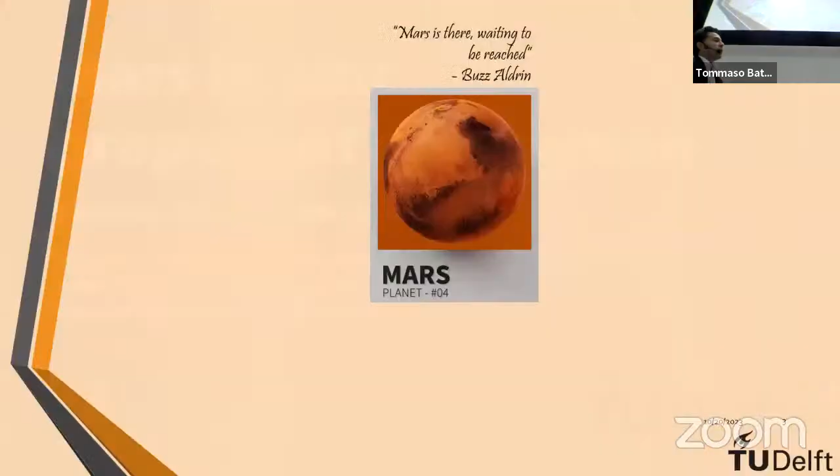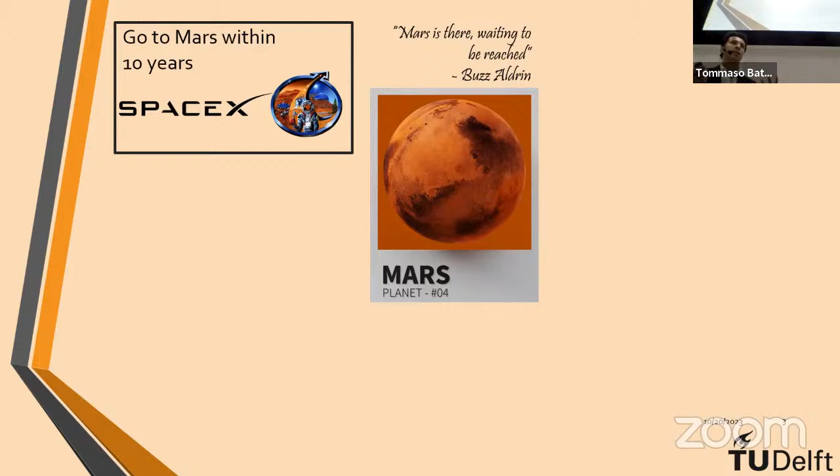So the goal is to go to Mars within 10 years. It's a challenge that SpaceX took on first hand, and the Mars Society have done a fantastic job spreading the word and raising awareness about the topic. SpaceX developed Starship, the rocket that is going to take us to Mars, which made its maiden flight in April of this year.

Starship has an engine called the Raptor engine that uses a deep cryo-methalox combination, meaning it combines methane as fuel and oxygen as the oxidizer for combustion, producing the thrust to leave this planet.

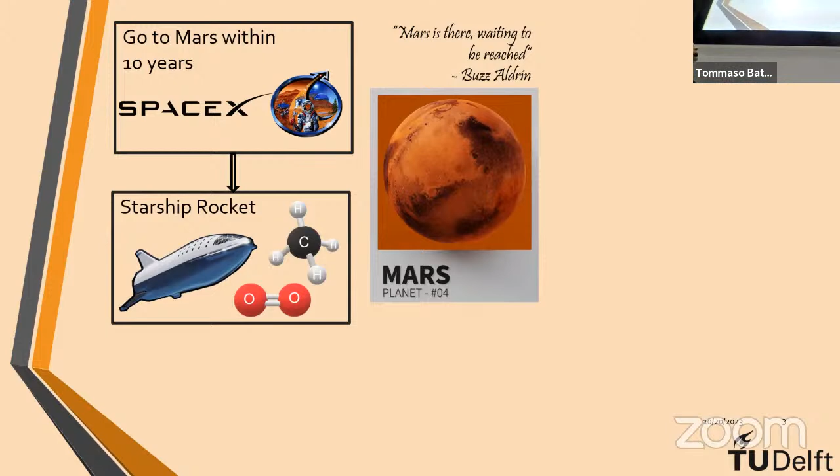Not only will we need a rocket to go to Mars, we will also need technologies to survive on the red planet. NASA has been working for many years and developed guidelines for companies to design these technologies that would allow us to survive on Mars.

And some of these technologies use what is called in situ resource utilization, or ISRU. ISRU basically means that you use the resources already available on Mars to produce whatever you need to produce.

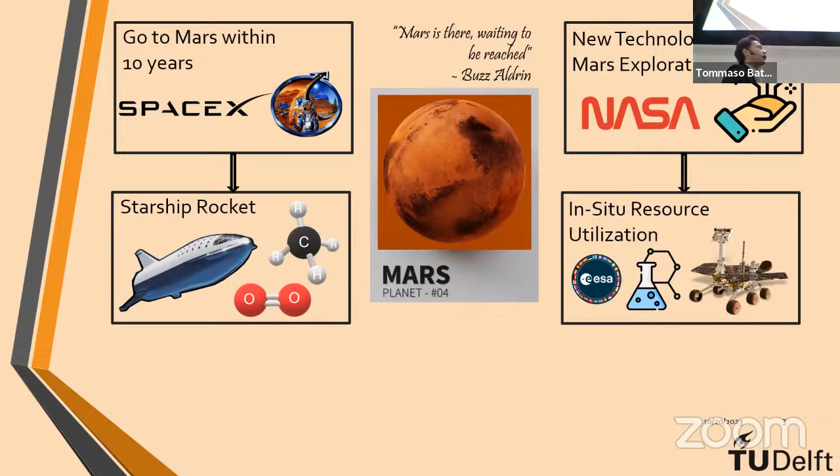As part of this work, I visited the European Space Agency. I have to give thanks to Louis for allowing me to do so, here in Noordwijk in the Netherlands, at the research center, and I worked with some researchers who directly work on these topics, who greatly helped me as well.

So the goal today is to design and model a propellant production plant on Mars. Now let's talk about the Mars mission. The trip is expected to last 6 months, for a mission duration of 3 Earth years: 6 months to go, 2 Earth years on Mars, and 6 months to come back.

But the conditions on Mars are really challenging. It's really cold on Mars, with an average temperature of negative 63 degrees. It can get warm during the day, but very cold during the night. I have to say, it doesn't rain on Mars, so it's already better than the Netherlands.

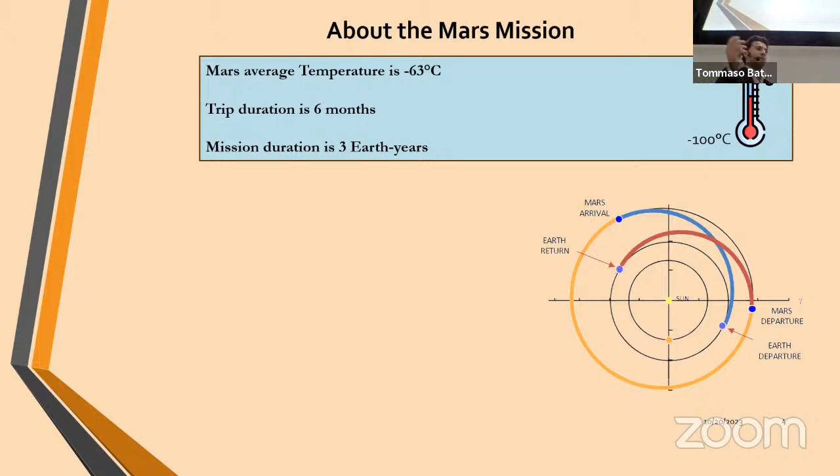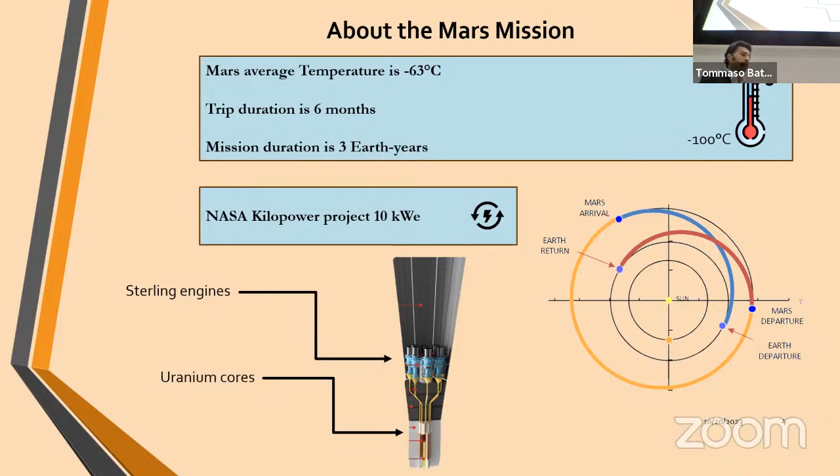We will need power on Mars. NASA has developed the Kilopower project, a nuclear reactor that uses the heat of decay of enriched uranium to produce heat that runs Stirling engines. They actually proof-checked this technology. It's ready to go, and they scaled it up to 10 kilowatts. For now, the largest size they've managed to accomplish is 10 kilowatts of electric power that this reactor can produce. Moving on, the first step of any thesis is to develop the research question.

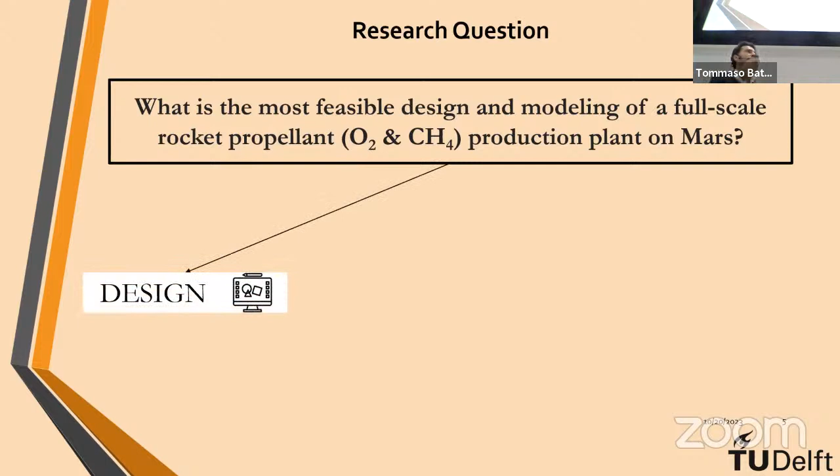The research question is: what is the most feasible design and modeling of a full-scale rocket propellant production plant on Mars? It's a very broad challenge, so it was decided to divide it into 3 sub-questions. The first deals with the design of the plant, the second with the modeling of the plant, and the third is a more theoretical aspect that we will see later.

So by design, what do we mean? We mean how to integrate NASA's guidelines into the design of the plant. By modeling, we mean how do we exploit the Martian environment to make our plant as efficient as possible. And the theoretical approach, which we'll see later on, is the development of a methodology for an exergy analysis on a different planet.

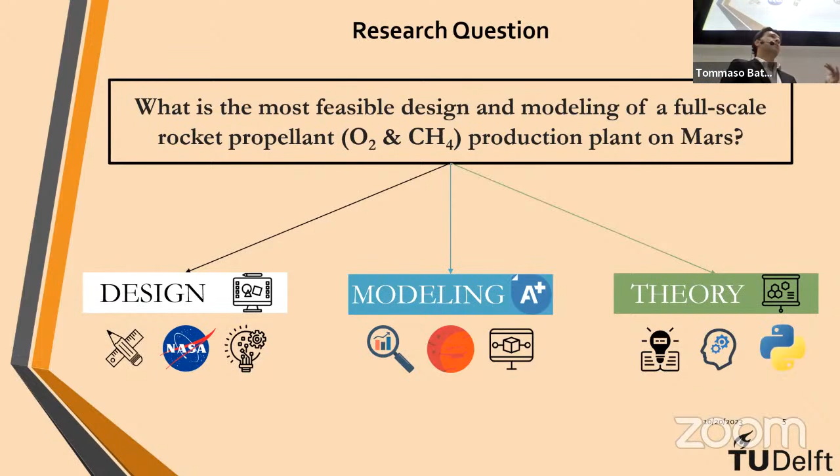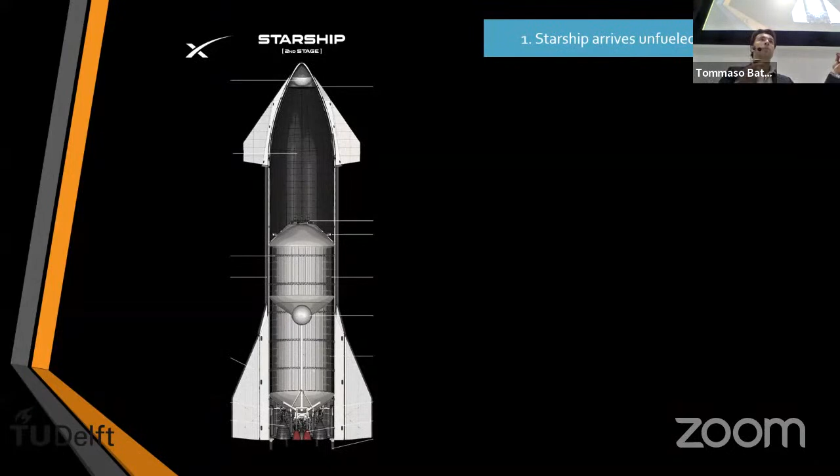Let's start with the rocket itself. Starship is the rocket that is going to take us to Mars. The goal is to have Starship land on Mars unfueled, completely empty, to produce the propellant on site, and then have the astronauts return to Earth. One of the goals of this work is to understand the cost efficiency of this. Starship has two tanks: one for methane, 267 metric tons, and one for oxygen, 933 metric tons, for a total propellant mass of 1,200 metric tons.

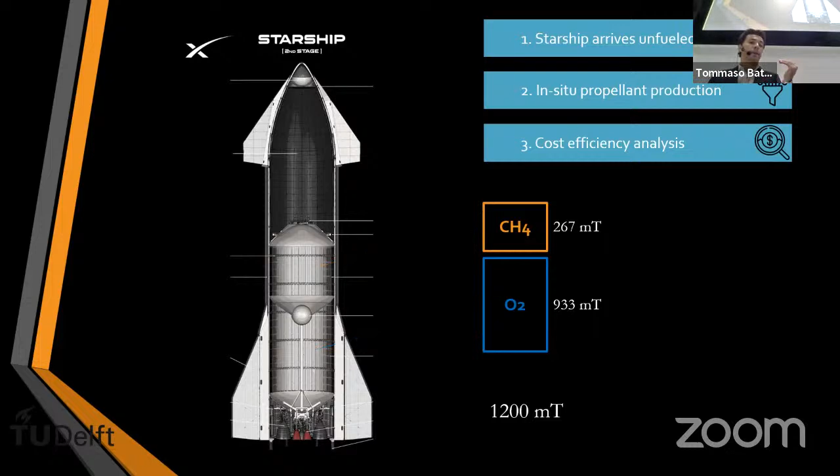In this work, we will design a production system which will have an X metric ton mass. One of the goals is to compare how much lighter this is than the propellant we have to bring to Mars.

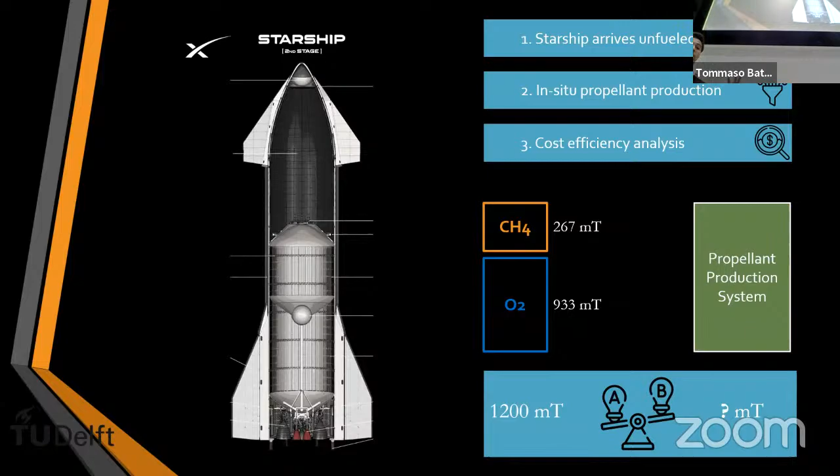Now let's talk about how we're going to produce the propellant—methane and oxygen. The chemistry of the plant is really simple. At the bottom of the screen you see the outputs, oxygen and methane. Let's start with how we'll produce the oxygen. The oxygen is produced by splitting water into hydrogen and oxygen via the electrolysis reaction: 4 moles of water give us 4 moles of hydrogen and 2 moles of oxygen. As you can see, one of the inputs we will need is water.

The splitting of the water gives us hydrogen, which combined with CO2 via the Sabatier reaction gives us methane. It's a reaction discovered many years ago, but it remained dormant because methane on this planet is very available underground. Now it's facing a kind of renaissance since it's important to produce methane sustainably—even on Earth you can produce methane with green hydrogen and captured CO2. Our energy infrastructure is already working on methane, so this would be a way to produce methane on Earth as well.

Let's go back to Mars. As mentioned, by combining 1 mole of CO2 and 4 moles of hydrogen, we get 1 mole of methane and 2 moles of water. The water can be recycled back, and the methane is our product. So as you can see, we need 2 inputs for our 2 outputs.

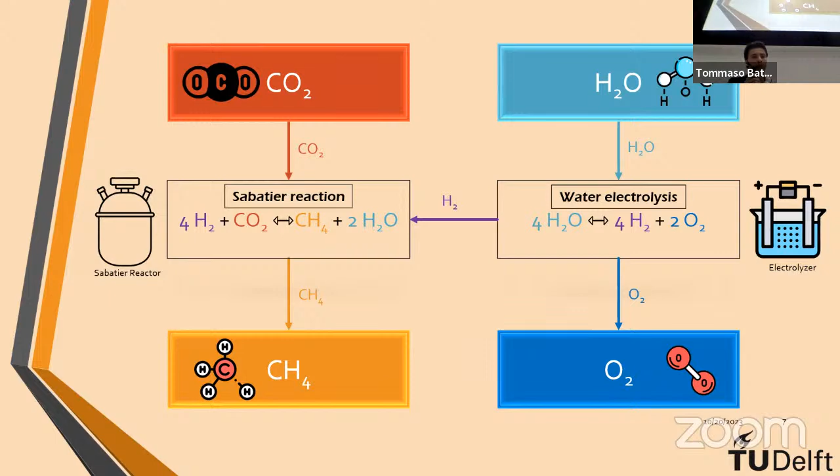Now that the chemistry is clear, we can move on to the roadmap for today's presentation. In order to produce our propellant, we need to identify which resources are available on Mars, how we're going to extract them, how we're going to process them to get our outputs, and how the modeling has been carried out. Then we will look into the exergy analysis, which is the biggest contribution to the literature of this work, and how seasonal variance affects the plant's performance. Lastly, we will look at the KPIs, the key performance indicators, which help us quantify the results.

Let's get started with resource identification. Our 2 inputs are CO2 and water. CO2 is very present on Mars—the Martian atmosphere is made up of 96% CO2 by volume, meaning the percentage by mass is even higher. The remaining 4%, which is the interesting part, is argon and nitrogen. Argon and nitrogen are inert gases.

This means that they don't react in any reaction. So it's important to notice how we can grab the Martian atmosphere and have basically very pure CO2, and the remaining gases don't really interfere with our reactions. So it's important to degas them at the end of the day, but they don't pose a threat to the plant.

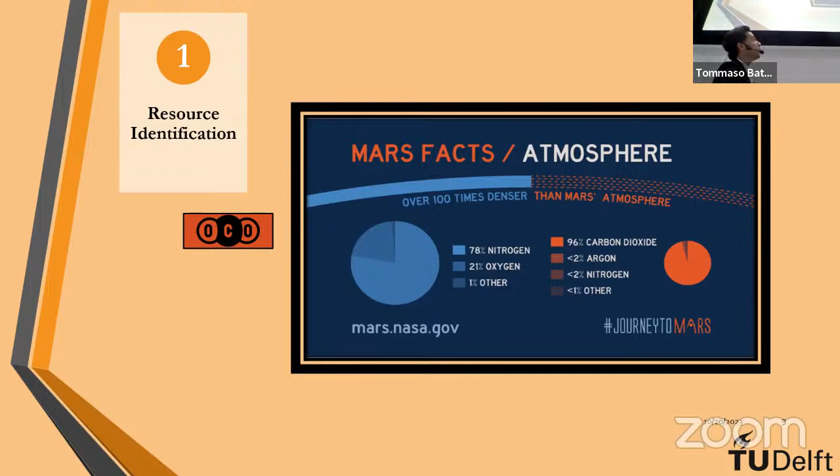The next input is water, and contrary to popular belief, there's a lot of water on Mars. Millions of years ago, Mars used to have oceans and rivers just like Earth. Then a catastrophic event happened, and now there's no water on the surface, but it's all under the ground. So water can be found in 2 ways: under the ground in the form of ice, and in the rocks itself in the form of hydrous clays and hydrous silica.

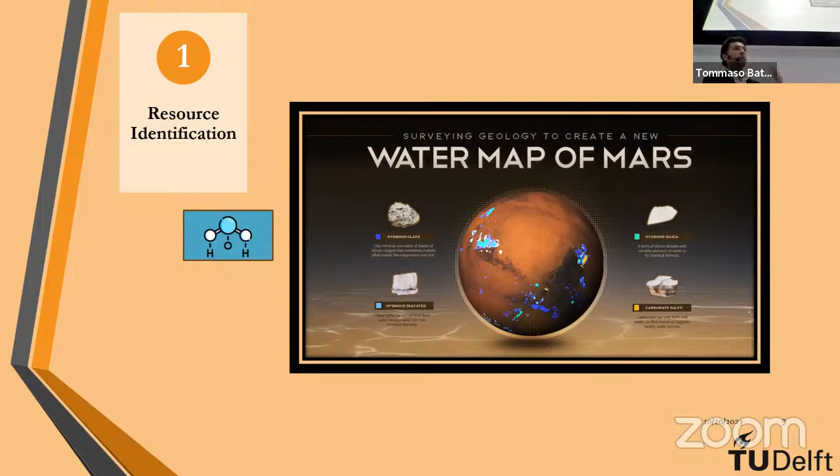So water is there, CO2 is there. How do we get them? The CO2, as mentioned, is already very pure, and the gases that are present don't pose a threat, so we can simply take it and compress it to the operating pressure of the reactors using a scroll pump compressor. The Martian atmosphere is very thin, with atmospheric pressure on average of 600 pascals, so it's going to be a big delta P to compress, nothing that a scroll pump compressor can't do. The operating pressure of the reactor is 3 bars, or 300 kilopascals. So this is how we're going to compress the CO2.

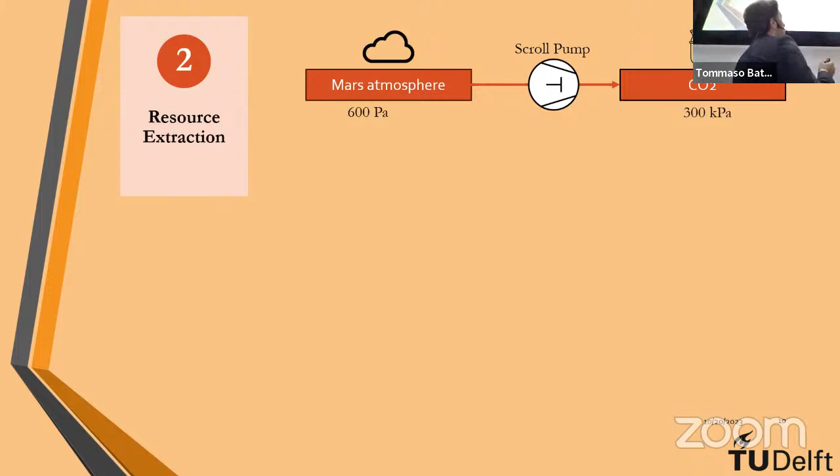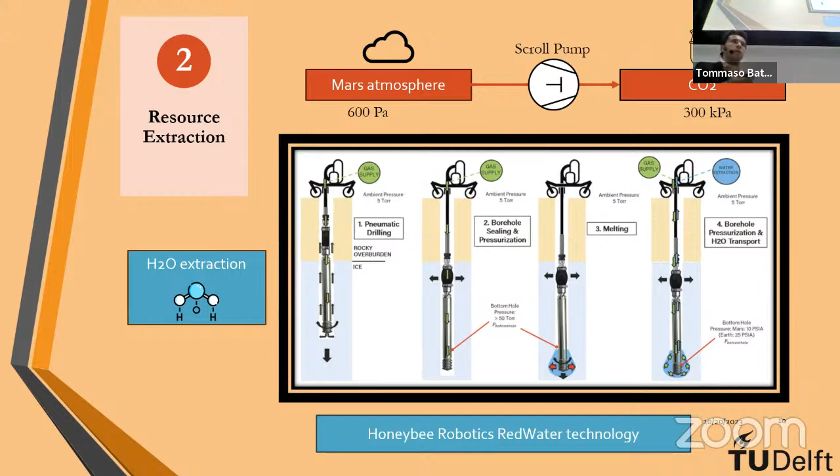The water is a different story. The water is in the form of ice and it's buried under the ground. This is a technology that was developed by Honeybee Robotics, who I had the pleasure to talk to and see their presentation last week in Tempe, Arizona, at the Mars Society Convention. I talked to the developers of this technology to know more, since I use their technology in my work. Basically, it's a drill that will go under the ground for hundreds of meters, break through the ice, and find the purest ice that there is, which is very deep - again, hundreds of meters, they were talking about kilometers as well. They are going to chop the ice into cubes at the bottom of this tube, of this drill, and then use microwaves to melt it and bring the liquid water up. It's a sound technology that was already awarded a contract by NASA. So yeah, I use this for this work.

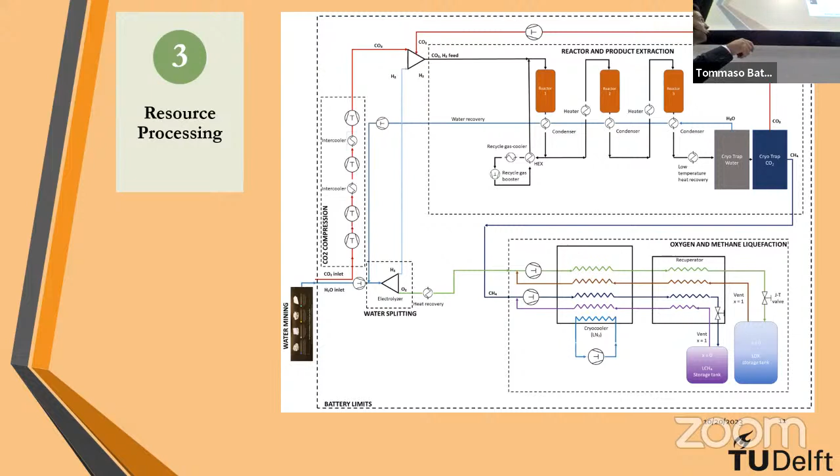Let's move to the process. Now, what you see in the figure is the block flow diagram of this plant. As you can see, here are our inlets, CO2 and water. The first step is to compress the CO2, which is done by 4 stages of scroll pump compressors for a total of 14 kilowatts.

The water, on the other hand, is split by a solid oxide electrolyzer, split into hydrogen and oxygen, of course. Now, this is the heavy duty part of the plant, power-wise. The technology of SOEL, or solid oxide electrolysis, was chosen for 2 reasons. The first one is the efficiency - we will need a very efficient machine on Mars. Money is not a problem. SOEL is expected to have a very high efficiency heading into the future. The second one is the compactness of the machine. It's a very compact machine that splits the water in the gas phase rather than the liquid phase. And it's invertible - by simply switching the switch, you can use it as a fuel cell.

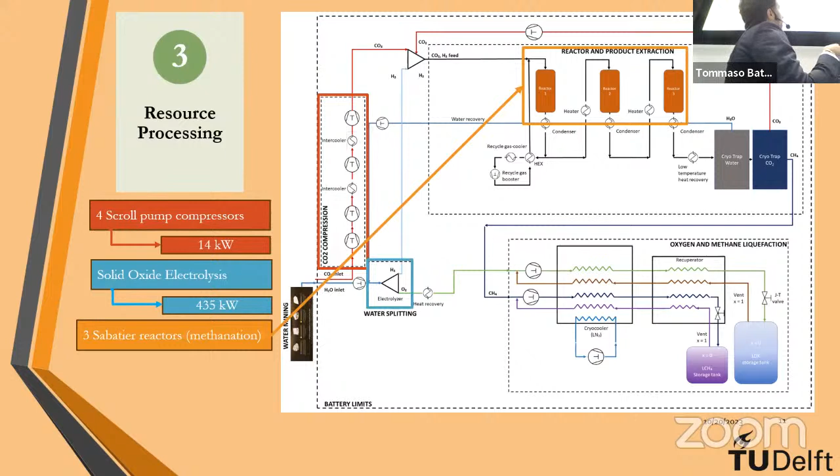Now, moving on, you can see at the top of the screen, the reactors. The result of the simulations were 3 in-series reactors where the methane is produced. Now, we also produce water, if you remember the chemistry. So after every reactor, there is a condenser that takes the water away and recycles it. It's important not to have water going into the next reactor to improve the efficiency.

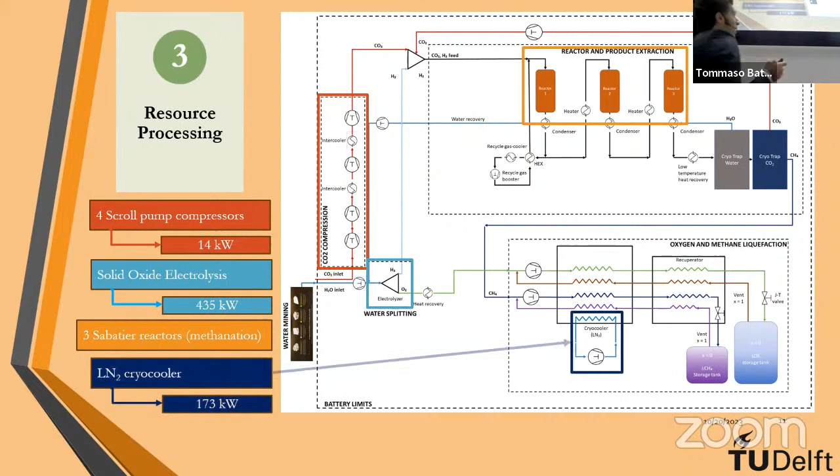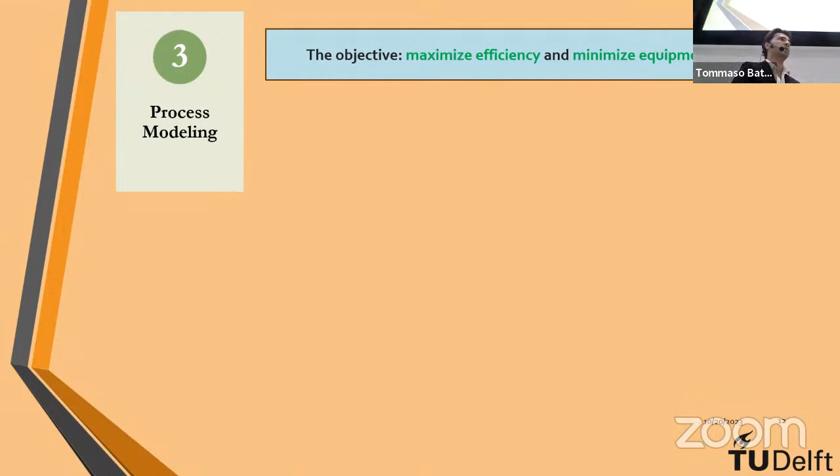Now, I talked a lot about the simulations, but what are the simulations? The simulations were carried out on 3 different softwares with this goal: maximize efficiency, minimize equipment mass. The lighter the plant is, the easier it is to bring to Mars and the cheaper it is.

The first software that I used is Aspen Plus. Aspen Plus is a process engineering software for process plant design, where the sensitivity analysis were carried out. Sensitivity analysis just means finding the optimal point for temperature, pressure, and so on. Heat integration, so how the heat is exchanged within the plant, and any type of simulations that require thermodynamic values.

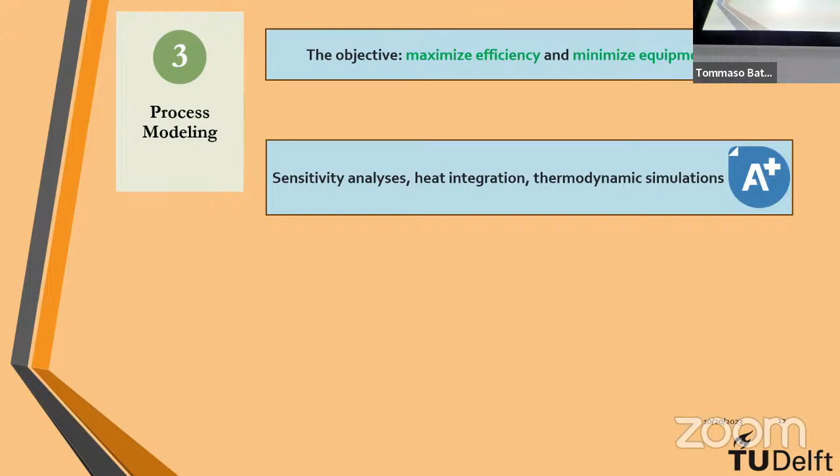The second software is Python. It's a programming software where the scripts for the equipment sizing were written, the dynamic simulations were carried out, and the exergy analysis, which we will see later on. And then Excel for general data analysis and equipment sizing.

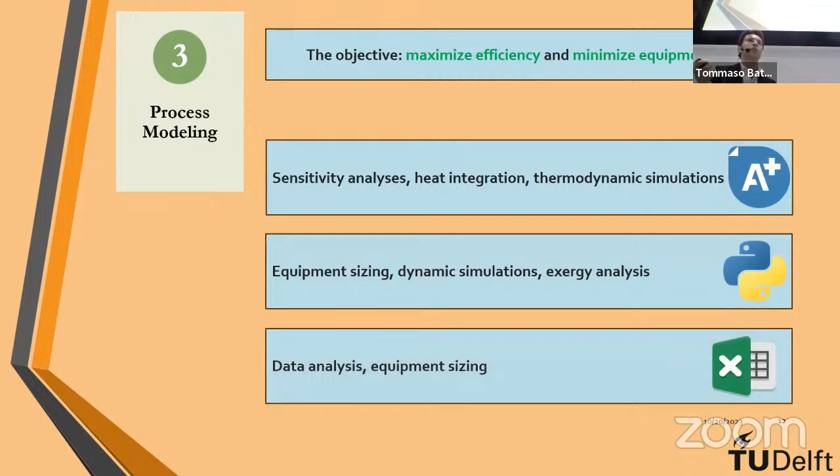Now, the biggest contribution of this work to the literature, the exergy analysis. This is the definition of exergy, the maximum obtainable work that can be extracted from a system when it interacts with its surroundings. You have to think about exergy as a way to quantify the quality of the energy.

In our input-output structure, as you've seen before, in our block flow diagram, we had 3 types of streams: material streams, so CO2, water, methane, oxygen, and everything that happens in the middle, heat flows, and work flows.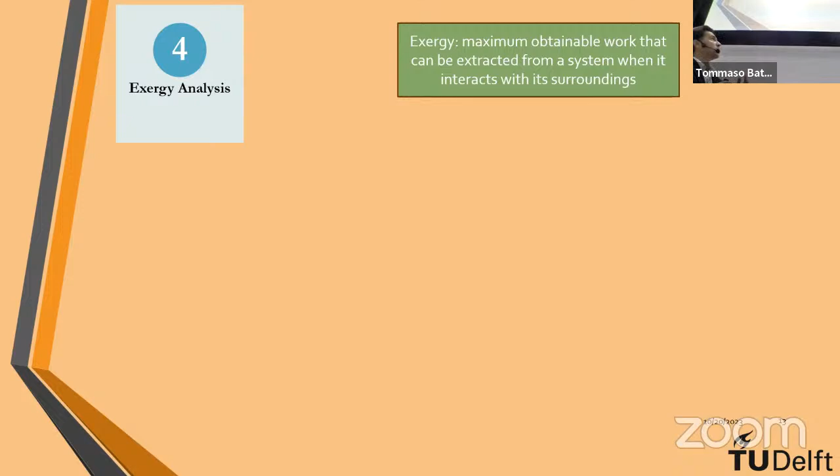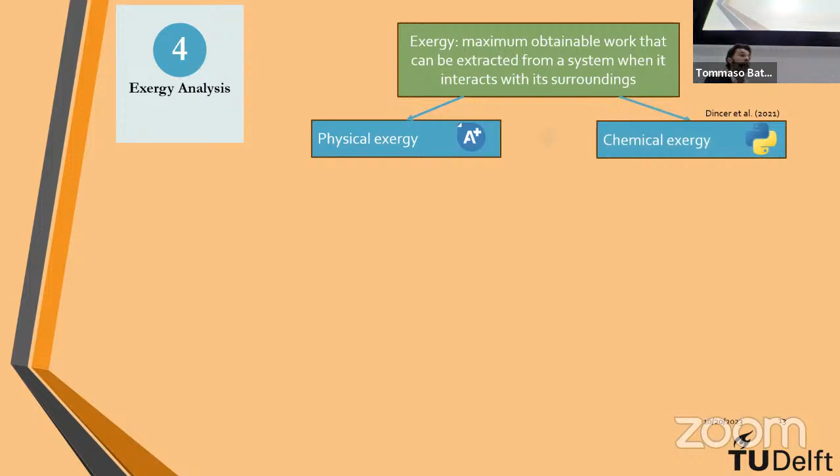Let's talk about material flows. Material flows have an exergy that is given by two contributions: the first one is physical exergy, the second one is chemical exergy. Physical exergy can be computed, and the addition of both gives us the total exergy of the stream. The physical exergy is computed directly on Aspen Plus. You simply have to give the new reference state, which on Mars is 210 Kelvin and 600 pascals, and Aspen simply computes the values of the physical exergy.

But material flows have another component, chemical exergy. Chemical exergy values are found on tables under Earth standard conditions. We need to find a way to compute these chemical exergy values under Mars's standard condition. So this is the hard part of this presentation. Stay with me.

The way that this was developed was to understand, first of all, what the reference state is. The reference state is the Martian air. The Martian air, we've seen before, is made up of 96% CO2, 2% nitrogen, 2% argon, and then there's traces of water and oxygen, which is really important. This is because by understanding this standard fluid, which has a standard temperature of 210 Kelvin and a standard pressure of 600 pascals, we can compute what the chemical exergies of the molecules present in the atmosphere is.

Using this formula right here, which comes from the definition of exergy and the ideal gas law, we combine them together. By calculating what the partial pressure of every one of these components is in the Martian atmosphere, we can calculate what the chemical exergy under the new standard conditions is.

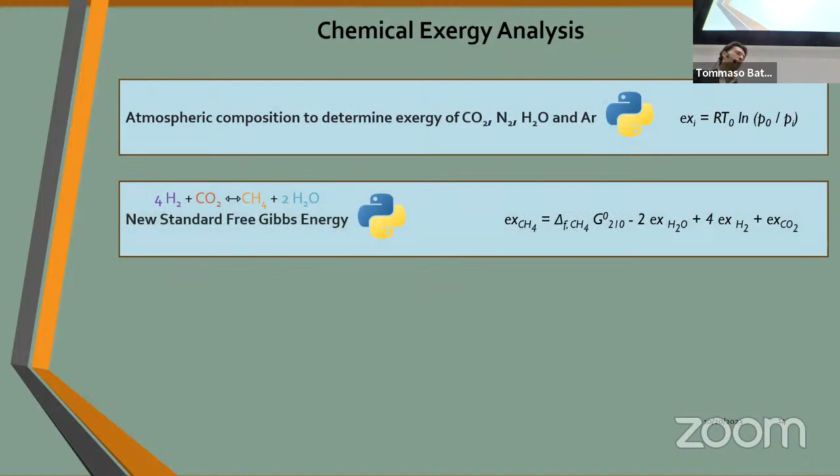What about the molecules that are not in the Martian air? We do it by using the methodology developed by Dincer et al., which I cited in the previous slide, whereby simply computing the new standard Gibbs free energy of formation of the chemical reaction that we saw before, and using this formula right here.

So the chemical exergy of methane is equal to, under new standard conditions at 210 Kelvin, the Gibbs free energy minus 2 times the stoichiometric factor of water, because it's on the same side as methane, plus the exergy of hydrogen and the exergy of CO2 with their stoichiometric factors. And we get the chemical exergy of methane under these new standard conditions. Same thing we do for the hydrogen. Ta-da, so this is how this was carried out.

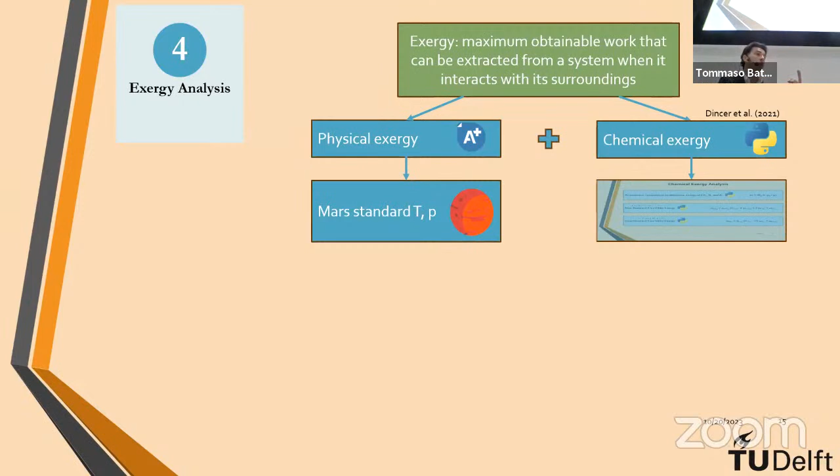Now, by adding the chemical exergy and the physical exergy, we get the exergy of the material streams. If you remember, we have two more streams to look into: the heat flows and the work flows. Work is considered pure exergy, this is because electricity is the purest form of energy, so 1 kilowatt of electricity of work is equal to 1 kilowatt of exergy.

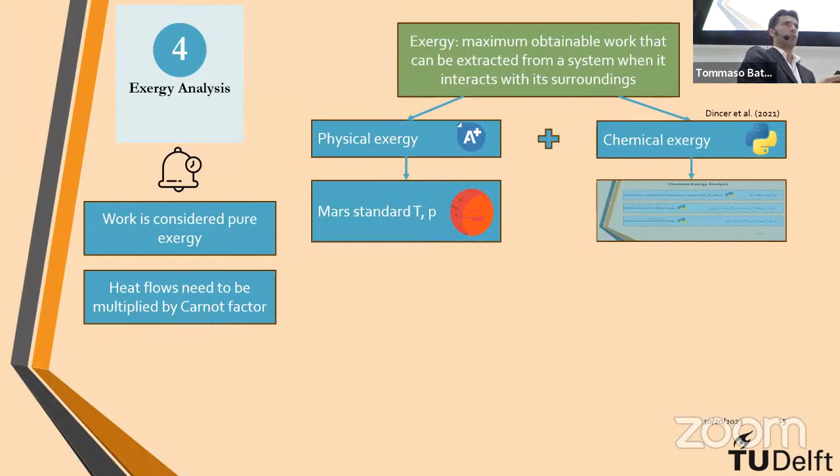Heat flows, though, need to be multiplied by the Carnot factor to get the exergy. The Carnot factor is a factor that takes into account the quality of the heat. By using this formula right here, and by dividing the ambient temperature by the temperature at which the heat is exchanged, we get the exergy of the heat flow. So a heat flow exchanged at a higher temperature is going to have a higher exergy because it's of a higher quality.

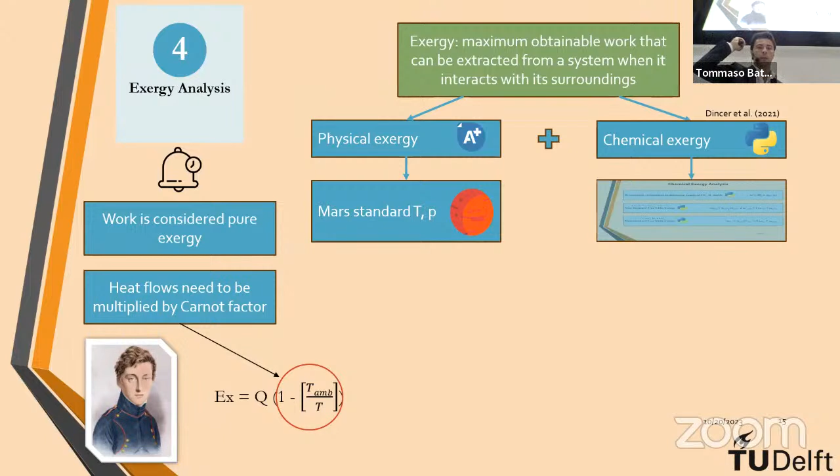So by doing so, we've computed all the streams we needed: work, heat, and material. Now we can compute what is the second law efficiency of the plant, which is the ratio between the output exergy and the input exergy. And it amounts to 62.7% in this case.

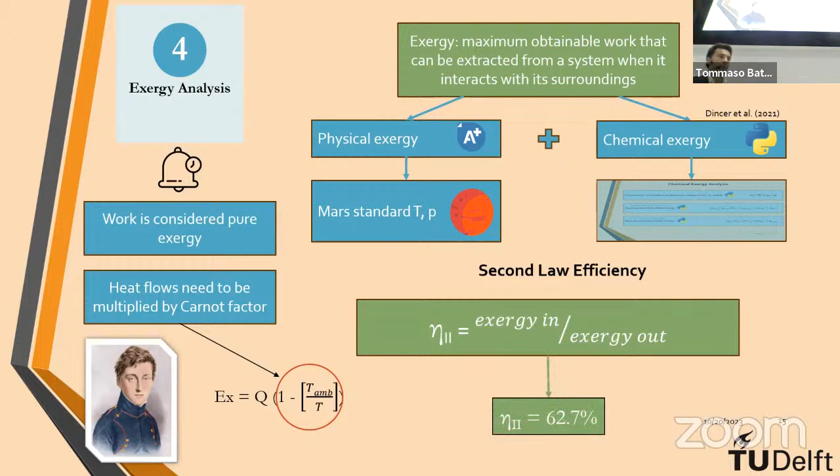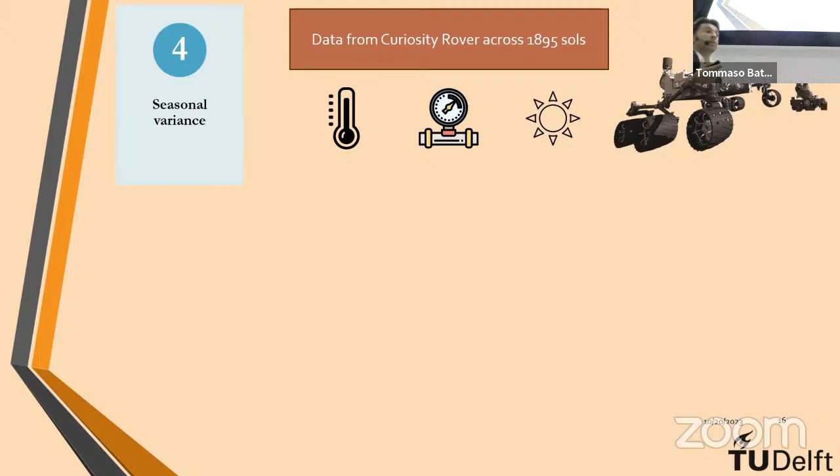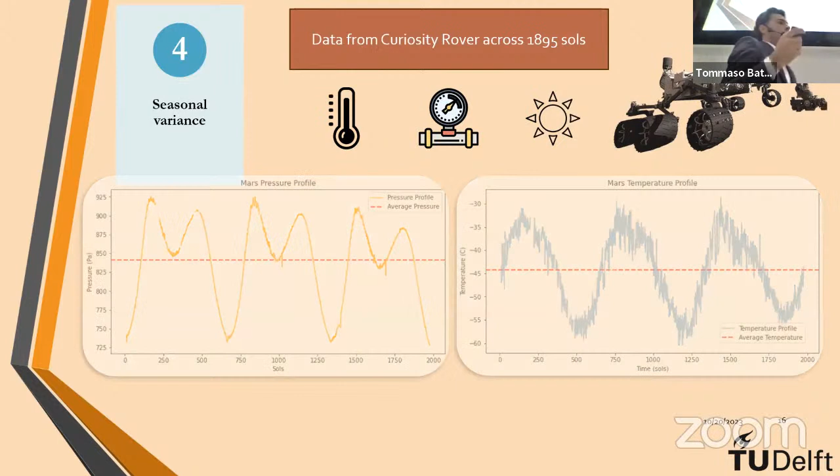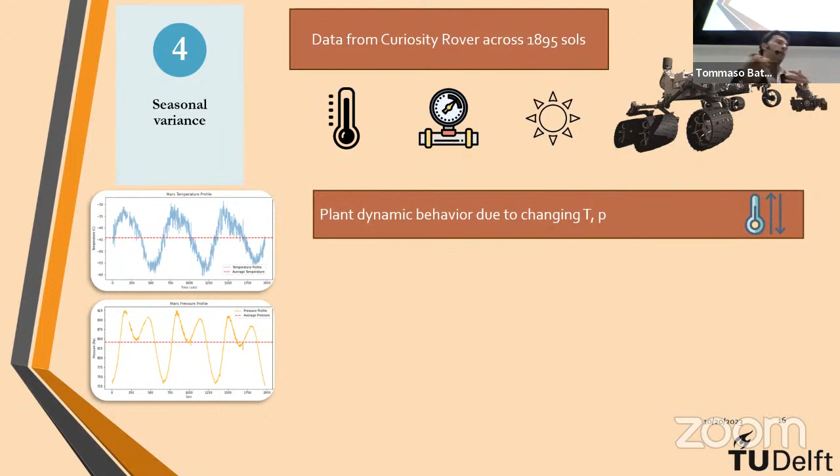Now let's move on to the dynamic behavior of the plant. In 2011, NASA sent the Curiosity rover to Mars, and since then it has been gathering data about temperature, pressure, solar irradiance, and so on. By gathering this data over an interval of 1,895 sols, 1 sol being 1 Martian day, we can compute the pressure and temperature profiles on Mars at the rover's site. As you can see, it's basically 3 Martian years, summer, winter, summer, winter, summer, winter. By combining the data of our plant with this data, we can see how the plant interacts with the environment and how the changing environment makes the plant behave differently.

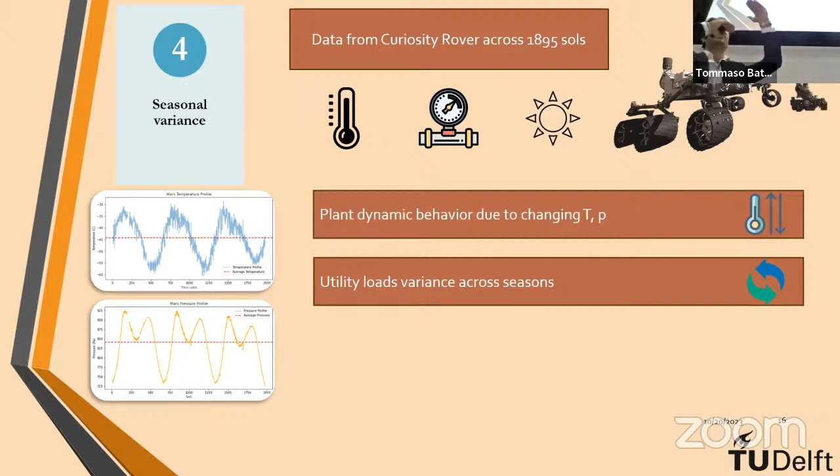You have to imagine that the plant interacts with the environment in two ways. The first is directly, by taking fluid from the environment, in the case of the CO2 coming from the atmosphere. In the summer, the CO2 has a higher pressure, and in the winter, a lower pressure. This means that if the compressors have to compress the CO2 to a certain pressure, in the summer, since it's already at a high pressure, the compressors have to do less work than with the lower pressure input in the winter. So the load of the compressor changes with the changing pressure and temperature of the CO2.

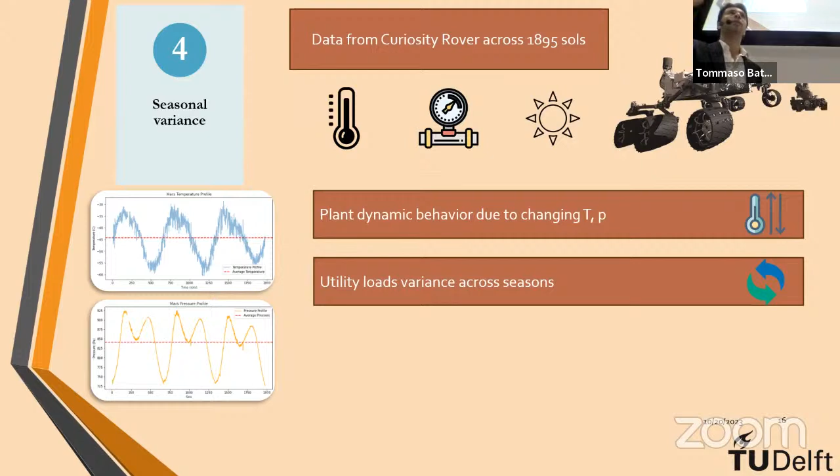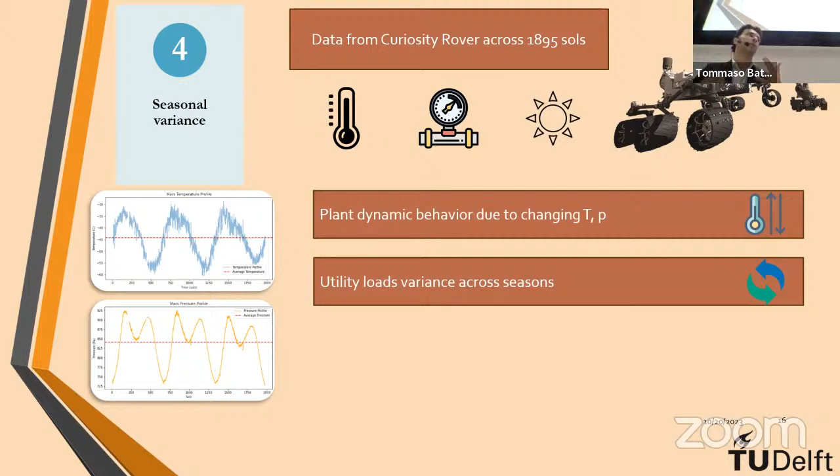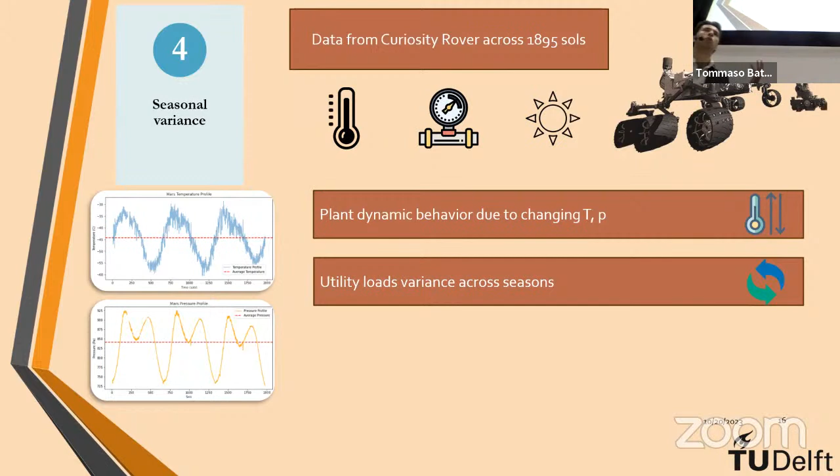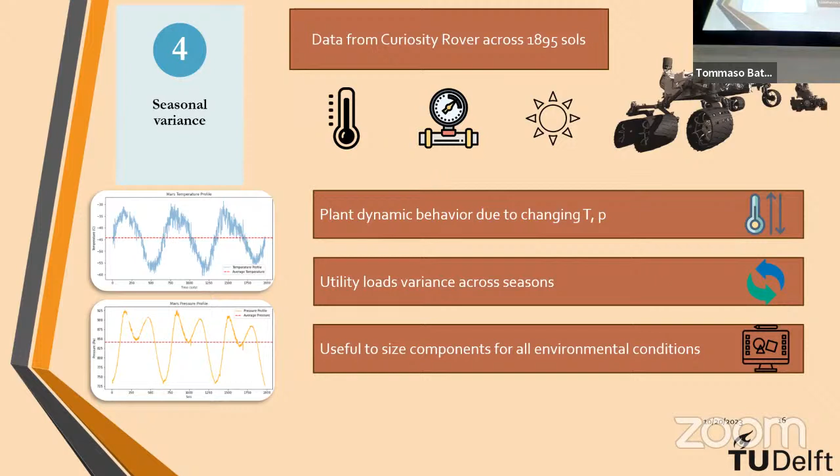Another way the plant interacts with the environment is by exchanging heat, dumping heat to or taking heat from the environment. The temperature is a key factor. In the summer, on a hot day, the coolers that need to dump heat to the environment work less efficiently. In the winter, during the night when it's very cold, the heaters that use heat from the environment work less efficiently, and so on. By combining all this data, the plant operational data and the weather data from Mars, we can see how the behavior of the plant changes, and we can size the equipment to withstand any environmental condition, so the coolers can withstand the harshest summer days, and the heaters the harshest nights. The results are available in the paper, in the report.

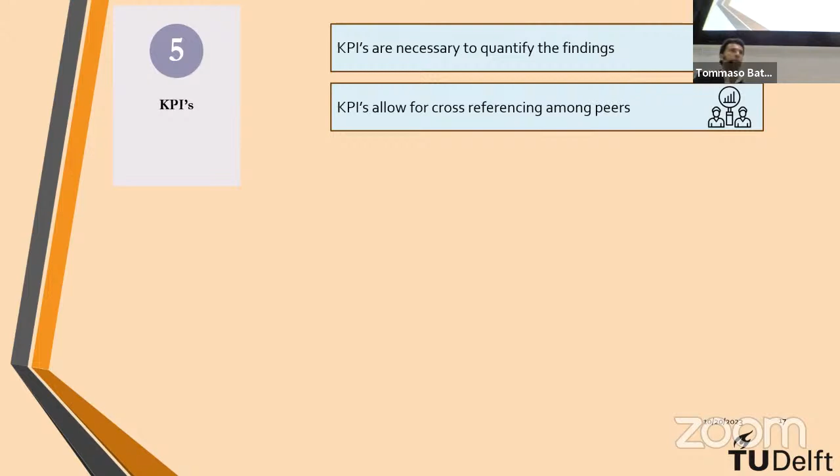Now let's look at the KPIs, key performance indicators. We've talked about how the work was carried out, but it's important to quantify the results. KPIs allow us to quantify the findings and also allow for cross-referencing among peers. This means that if somebody else wants to pick up my work and redo the experiments, and hopefully improve them, they can exactly see how the results were computed and compare them. In this case, 3 KPIs were chosen, one for every sub-question, in order to quantify exactly the research question and the sub-questions.

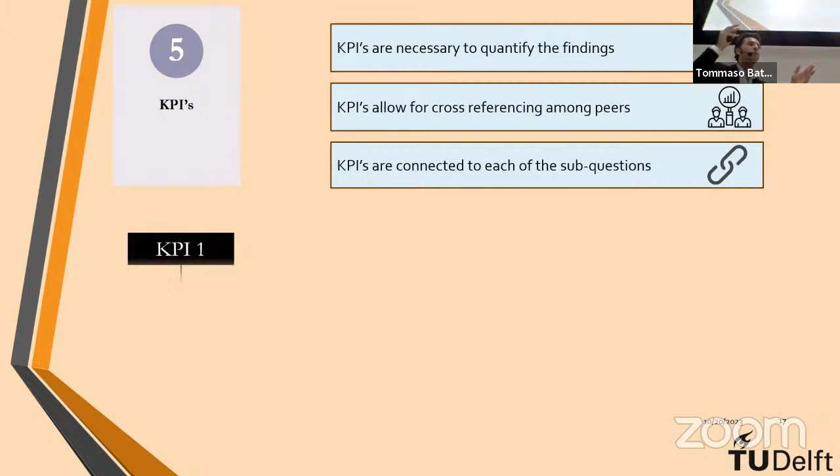The first KPI is the ratio between the equipment mass and the propellant mass that needs to be produced, which is 11%. This means that by producing propellant on site, we save 89% in launched mass from Earth.

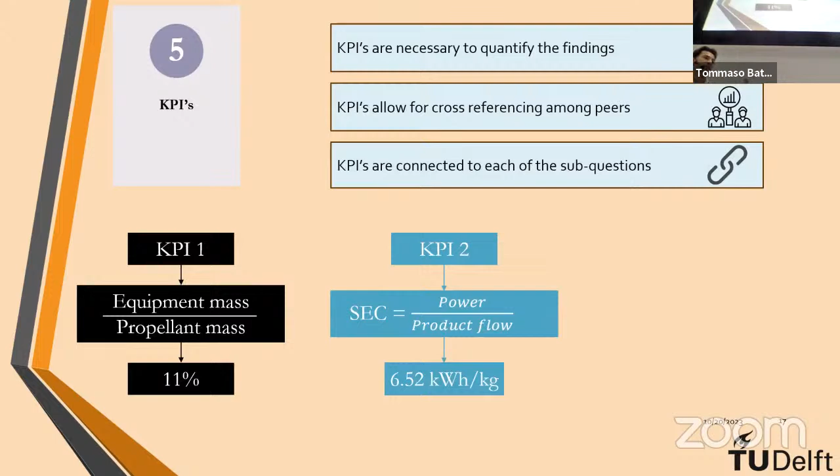The second KPI, relating to the modeling and how to increase efficiency, is the specific energy consumption, the ratio between the power and the product flow, which amounts to 6.52 kilowatt hours per kilogram. And the third, a more theoretical aspect we've seen before, is the second law efficiency, which is equal to 62.7%.

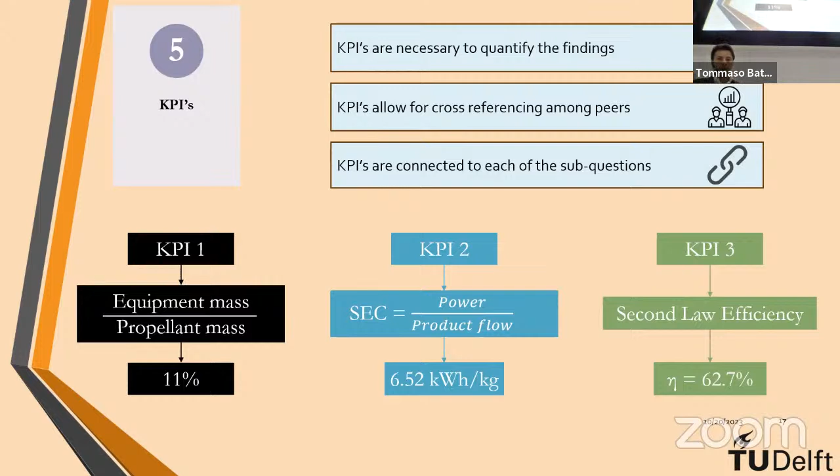Now, moving on to the conclusions. In situ propellant production is key to human missions to Mars. We need to find a way to get the astronauts back, and by doing so, we save 89% in launched mass. Money is a big factor in the space industry.

This work gave a methodology on how to conduct an exergy analysis on a different planet, and how to calculate the chemical exergy of species on Mars.

The first recommendation is to investigate increasing the efficiency of the equipment. If we make the electrolyzers more efficient, the whole plant is going to be more efficient. If we make the compressors more efficient, the whole plant is going to be more efficient. The second recommendation is to investigate how to respond to intermittency of energy sources. I showed this before at the beginning of this work: nuclear power was taken as the power source, but solar power is also available on Mars during the day. So it would be interesting to show how the plant will ramp up during the day when solar power is available and ramp down during the night when it's not.

Before I finish, I want to leave you with something. In 1969, we sent a man to the moon, and it opened a window which people hoped would have us today in 2023 among the stars, but we're not.

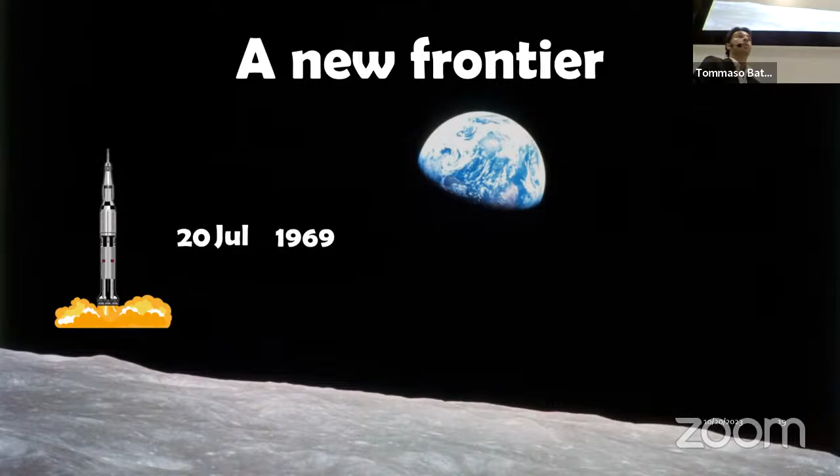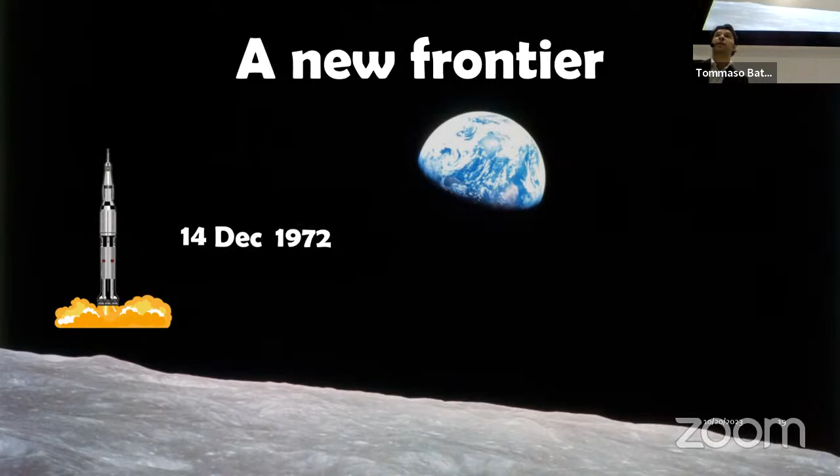It triggered a technological revolution. But something happened, and the last man that stepped on the moon was only three years later, in 1972, when the astronauts of the Apollo 17 mission were the last men to ever step on the moon.

The purpose of this work was not only to investigate the engineering behind the Mars missions, but to raise awareness about this topic. The window is about to open for us to go to Mars. SpaceX have developed the rocket, it's ready, we need to go.

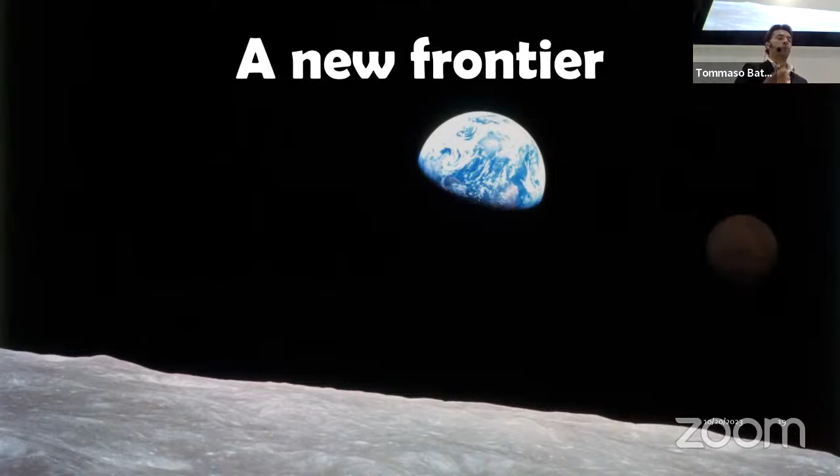So it's important to understand how the trip to Mars has the opportunity to spark another technological revolution, as the technologies that we will need to develop to survive on Mars are also going to aid life on Earth.

So most of all, the trip to Mars is about hope for the future, and pushing boundaries, because it will show the world how even the most impossible challenges can be overcome and how limits, like fears, are often just an illusion. Thank you.

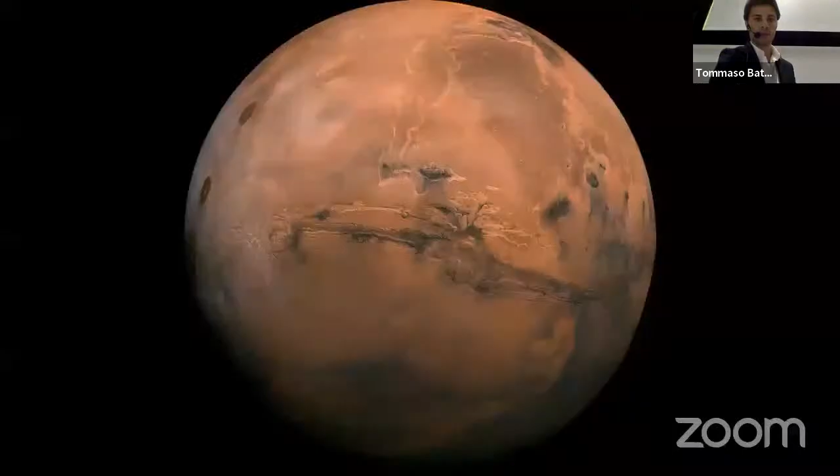And then the cool thing was that the water is actually heated by burning the hydrogen and oxygen that you produce in the electrolyzer itself. So by designing a burner that is 21 kilowatts in heat load, so not much, by oversizing this electrolyzer, where you produce more oxygen and hydrogen than you need, you burn them to heat the water. So basically it's a closed loop.

And about the solar power, I haven't looked into it honestly, because we talked a lot with Vibran about these energy sources, how to integrate them - can we use solar, can we use some dynamic simulations - but for the purpose of this work, we didn't. But yeah, I mean, maybe if you want a thesis, you can work on this.